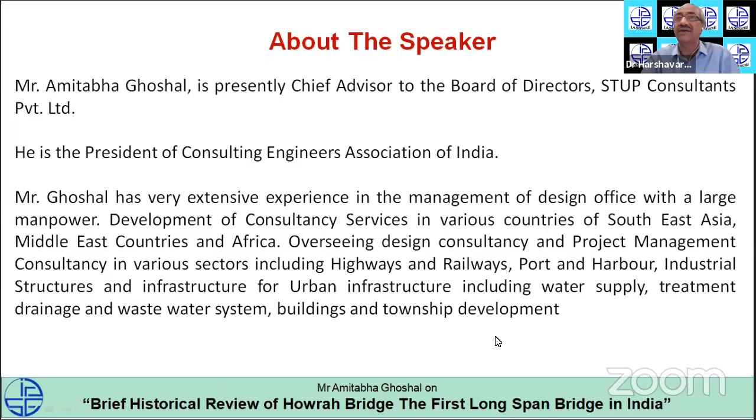We are indeed very fortunate to have someone of his eminence and stature with us today. The topic he has chosen is a beautiful one, which I'm sure at the end of the event will weld us all together in our bridge community and structural and civil engineering community.

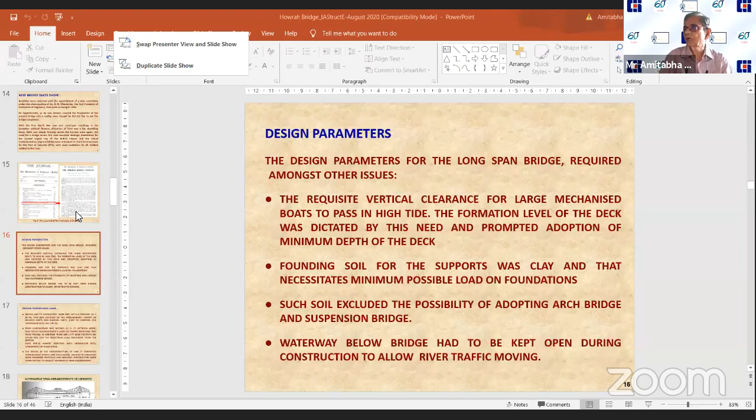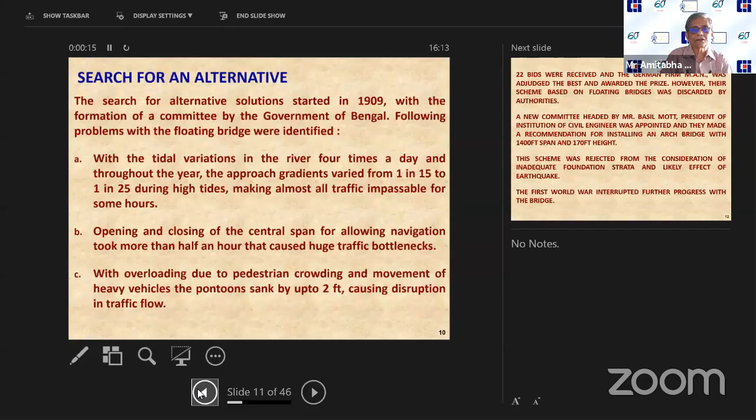Right, okay, sorry for this slight delay. You see, the title, as IAStructE has decided, is 'Brief Historical Review of Howrah Bridge, the First Long Span Bridge in India.'

This is a bridge which, as everybody knows, has been an icon of Calcutta, and for that matter, all over India, people recognize this bridge on sight. There have been films made with the name Howrah Bridge, not one, but many.

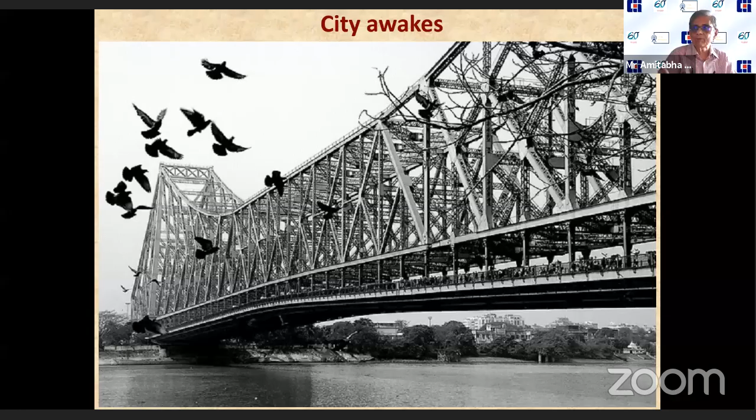And any film which shows Calcutta will somehow show this bridge with some opportunity. So the city awakes with the bridge, and it is there for the work day, and at night—for celebrating the 75th year of the bridge, Calcutta Port Trust, who still oversees this bridge, decided to make a lighting arrangement. The bridge keeps changing color at night. This is part of the city's nightlife, and anybody who wants to see Calcutta by night will have a view of it.

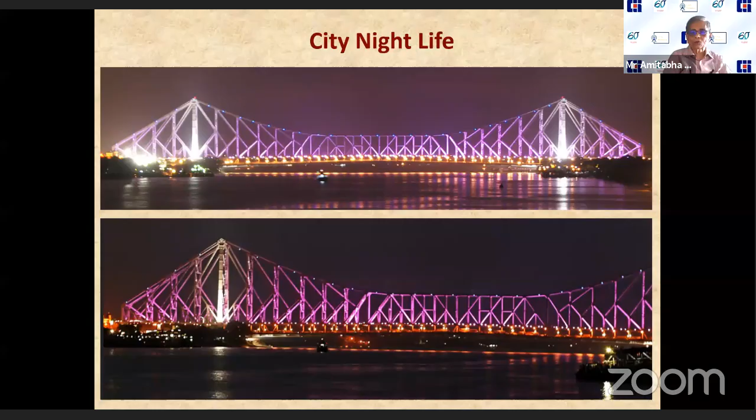You see, when we talk about a bridge, a bridge is not just infrastructure. I don't look at a bridge, and I'm sure you also don't look at a bridge, as a mere structure made of steel or concrete.

A bridge is essentially a link, not only between two places, but it links two separate settlements, two separate groups of people, and brings people together.

And that is how bridges are always glorified. If you go to San Francisco, you cannot come out without having a visit to the Golden Gate. There have been books written on Golden Gate, poems. And in London, the Tower Bridge is a prominent presence. Nobody has thought about dismantling that, even if it is a very old structure. Similarly, in Calcutta, I hope nobody will think of ever dismantling this, because this is part of Calcutta and its development.

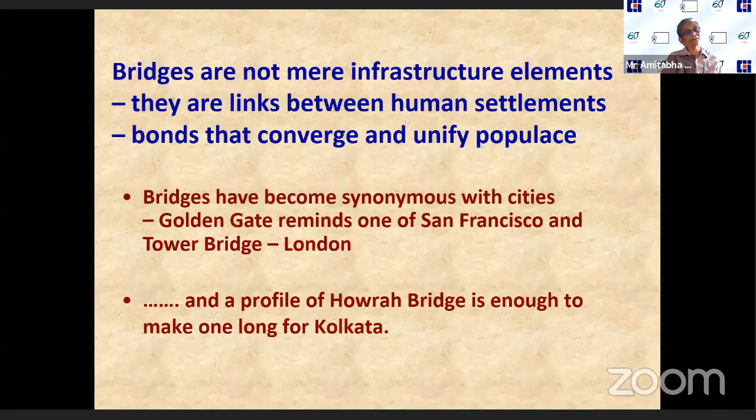People celebrate anniversaries of individuals and marriages, and sometimes we remember people after their death. We also celebrate anniversaries of organizations, just as we are celebrating the 60th year of CEAI. But engineering structures are taken for granted. Nobody usually thinks about an engineering structure unless it falls or gets damaged, or gets into news for some wrong reason, like an accident.

But an engineering structure reflects the toil and sweat of the engineers, our community. It is the fruition of a lot of effort that we see a structure built, completed, successfully maintained and utilized. I congratulate IAStructE for this initiative to celebrate this engineering marvel, and it is my hope that they will repeat such effort with other interesting structures in the country, which show the capability of the engineer.

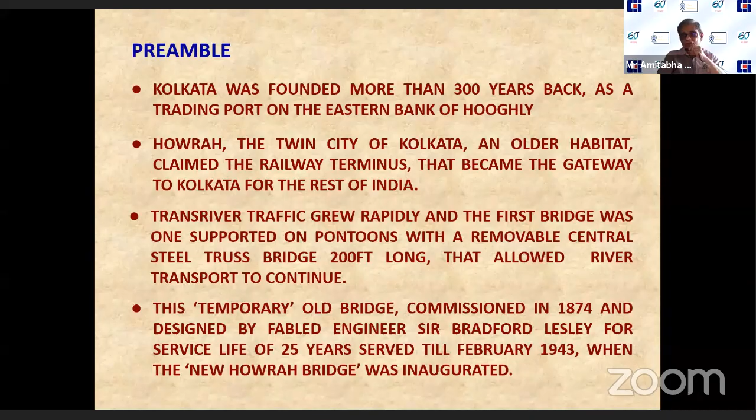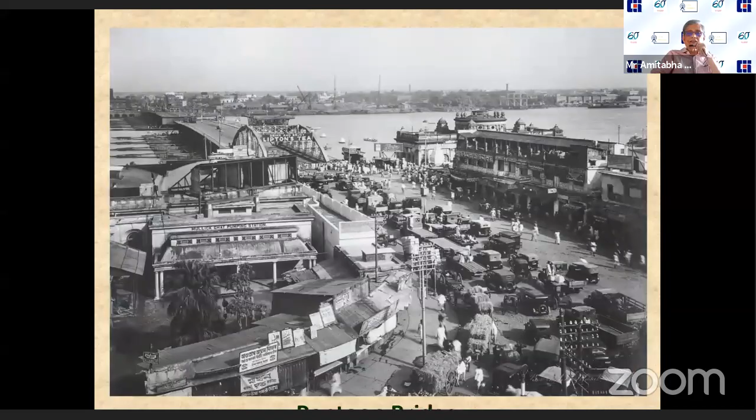Now here is another view. Even in those days, traffic jams were known. You can see when the pontoon bridge opened up, as seen here at the center, one piece of the bridge has been taken out and floated out, making the bridge discontinuous at the center. All the big watercrafts used to pass through this gap. During this period of opening, traffic would build up on both sides, and what we today know as a very common spectacle of traffic jams, that was there very much.

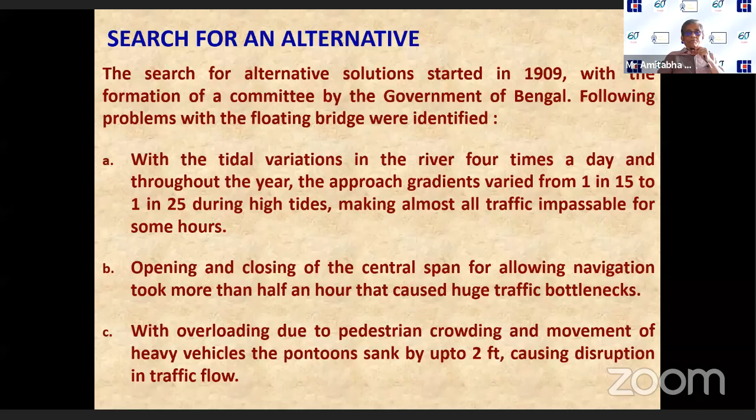Next. So they formed a committee of engineers, and invited international alternative schemes, more or less based on the floating bridge principle. But there were conditions given: no obstruction in the river channel, boats must flow all the time, minimum headroom of 29 feet from the highest water level so boats can cross, and a carriageway width of 60 feet.

In those days, it was a very, very futuristic thought, plus a footway of 10 feet on each side. And the gradient should not go steeper than 1 in 35, so that our friendly bullocks could cross the bridge.

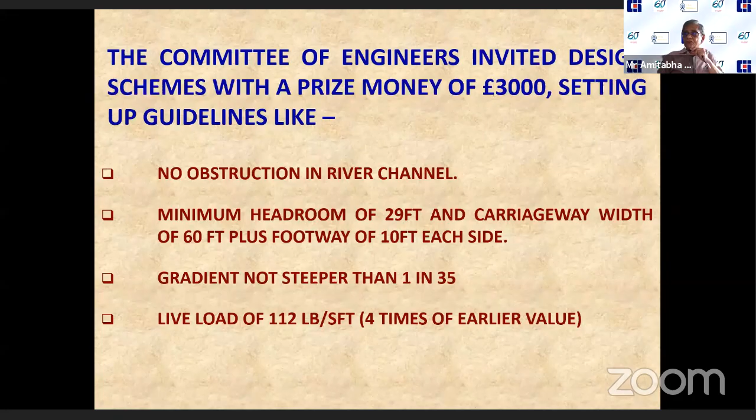The design load was given, and this prize money of 3,000 pounds was enough to attract a large number of entries. 22 bids were submitted, and the German firm MAN, which still exists, was adjudged the best and awarded the prize.

However, already there was rumbling that this business of a floating bridge cannot be a permanent solution, because one day or other a river craft will come and hit the so-called floating pier, and the bridge would be damaged. And then this variation of tide would always be there. That's the reason. So even though the prize was given, the entries were all discarded.

Then a new committee was formed. The president of the then Institution of Civil Engineers, UK, was appointed, and he recommended an arch bridge. Obviously, he did not have an idea about the Calcutta soil. Now, this was automatically rejected because of the inadequate foundation strata.

And meanwhile, the First World War came up and interrupted further progress with the bridge.

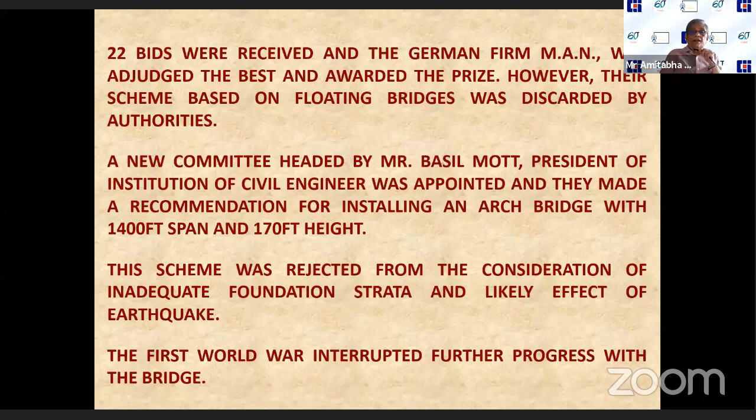Now, for a span, the port had already decided they could not afford to have a pier or an obstruction in the river, so that their flow of goods would not be disturbed. So they wanted a bridge which would be 1,500 feet or 457 meters, a single span across the river.

Now, what were the alternatives in those days for this type of bridge? One is the suspension bridge, which had already been built in the USA with a rigid anchor, where the cable is anchored into rock or some permanent structure. Another is the arch bridge, like the Sydney Harbour Bridge.

Or the third alternative was the balanced cantilever bridge, two of which, very famous, had just been completed. One is the Forth Bridge, the first major balanced cantilever bridge, and then the Quebec Bridge, which was also a successful balanced cantilever bridge. That can be done on soft soil as well, because the loads are always vertical.

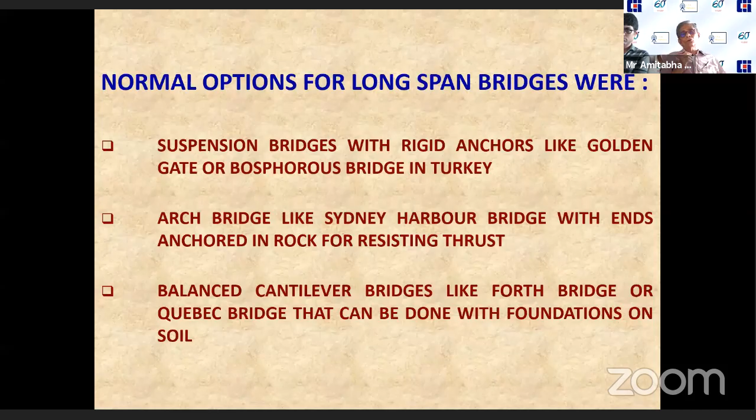Activities were started after the First World War, and a new committee was appointed under the chairmanship of Sir R.N. Mookerjee, Sir Rajendranath, who was the first president of the Institution of Engineers that came into being exactly 100 years back, in 1920. Sir R.N. Mookerjee was a persona to reckon with. He had established a firm, Martin Burn, which built the Victoria Memorial, the Belur Math, and many other structures, and was considered a very successful engineering company. He was naturally the first president of the Institution of Engineers.

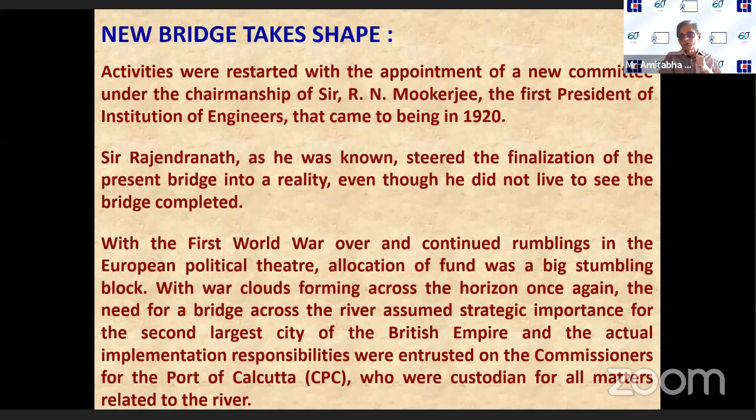This committee, if you remember the colonial times, had an Indian chairman while all the other members were very famous Caucasian engineers, mainly from England, one or two from Europe. That's the committee presided by Sir R.N. Mookerjee. His committee made a very thorough analysis of what is possible and what is not possible, and came forward with a solution for the permanent Howrah Bridge.

Just to indicate how important the Howrah Bridge was in those days, what you are seeing is the first volume of the Journal of Institution of Engineers, brought out in 1921, which had an article on the Howrah Bridge problem by one Mr. Bagley, who advocated very strongly for the floating bridge approach.

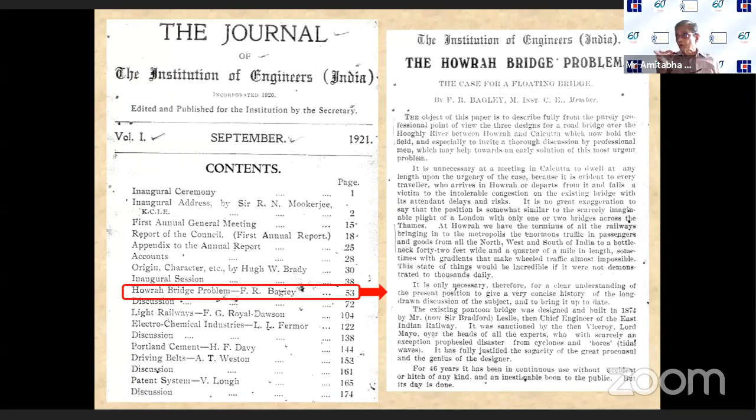The design parameters for the long span bridge included the same clearance of 29 feet above the highest water, with the founding soil being clay and silt requiring minimum load on foundation, and the waterway below the bridge had to be kept open during construction to allow river traffic to keep moving.

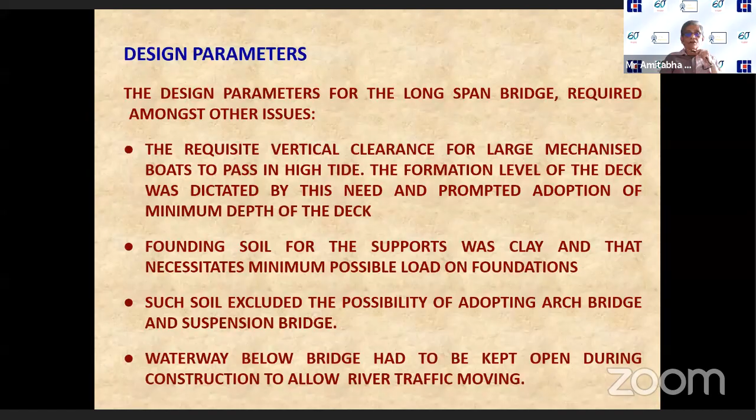The approaches had to be kept to a gradient of 1 in 35 maximum, but the bridge offered 1 in 40, making life much better for the bullock than 1 in 35. Today's Vidyasagar Setu, the second Hooghly bridge, has approaches of 1 in 25, but the old bridge has 1 in 40 - that's why it's so easy to get onto the bridge.

The future vision that those people had - they could see that with the Howrah station so close and the central business district growing just on the other side of the river, umpteen numbers of people coming from the suburbs would be crossing the river, and that's why they provided a footpath of 15 feet.

This design is very interestingly identical with the Vidyasagar Setu, which was built in the late 20th century, opened around 1993. It also has exactly 100 feet total width, including the footpath.

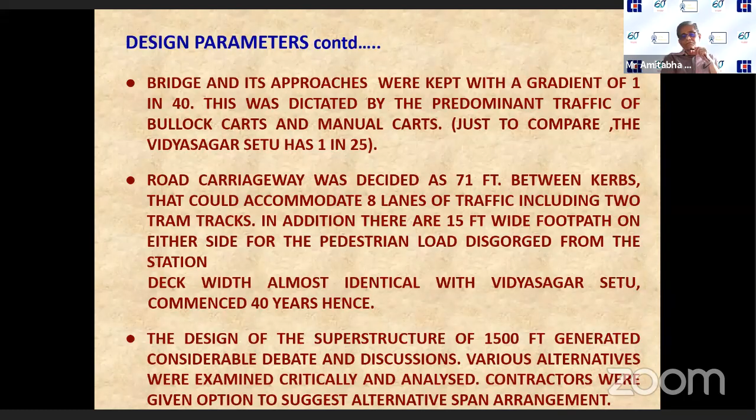The design of the superstructure for 1500 feet in those days naturally raised a lot of debate and discussion. Various alternatives were examined, and even after the official design was done by the consultants, Rendel, Palmer and Tritton (RPT), which has since ceased to exist and became High-Point Rendel for some time.

They came forward with alternatives. This scheme was recommended by Sir R.N. Mookerjee's committee - you can see the wisdom, as it is almost the same as the bridge we have today. It had a 1500 feet center span, with a suspended span at the center. The anchor span on both sides was 350 feet, anchored by dead weight on the end, so that lifting would not occur when the much longer cantilever comes into play. Those cantilevers from both sides support a hogback truss, which is the suspended span - that's why we call it a balanced cantilever suspended span.

The other alternative was a self-anchored suspension bridge, which should not require a static anchor, and should have a girder as a deck which itself would act to balance the horizontal thrust and accommodate the bridge without causing much horizontal thrust on its foundation.

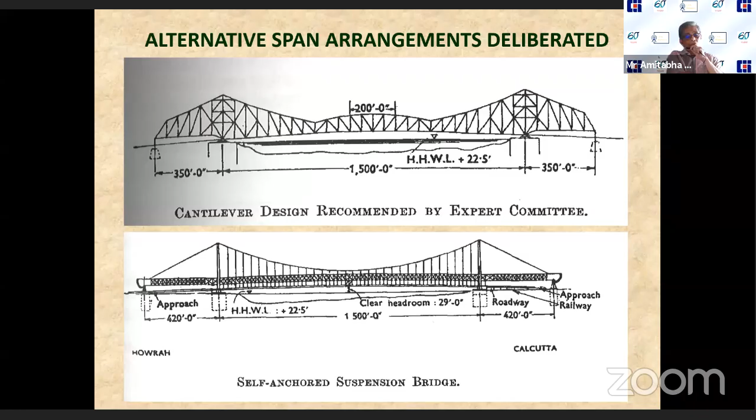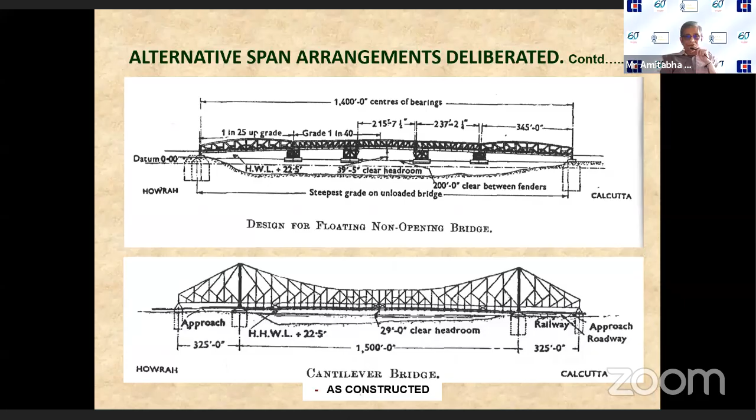The anchor was 325 feet. So as it is, there is an overturning moment, plus the weight of the suspended span, and that required, at the anchor, very heavy concrete blocks, 27 feet by 54 each, 2 numbers, going to a large depth, so that the bridge does not topple.

And the other interesting thing, you can see that the deck is hanging from the truss. The truss bridge is holding the deck, which is hung from vertical hangers, and the approach spans, the anchor spans, are kept open so that the vehicles could take a turn and go to the bank.

Unfortunately, by the time the bridge was being built, a lot of structures, including the first mint in the country, the first mechanized mint in the country, had come up just behind the Calcutta end of the bridge. And that's why straight flow of traffic was not possible. So traffic had to take a turn, a right angle turn, to go to the bank.

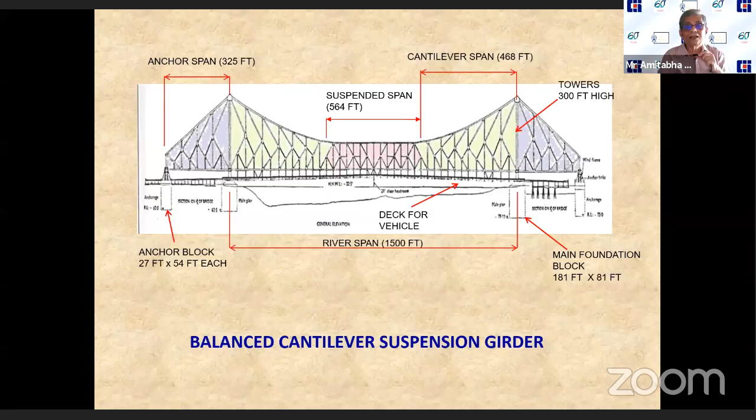Now, based on this official scheme of Rendel, Palmer and Trithon, Port Trust decided to invite global tenders, but they were wise enough to keep a provision that the tenderers can offer alternative design, that is EPC scheme: engineer, procure, and construct. A contractor was given the freedom to choose his option and give an alternative scheme which would be examined and valued.

Obviously, there were two intentions. One, whether a cheaper scheme can be obtained. And the other, which I think the consultants fully agreed with, that by having alternate designs by renowned constructors, they will get their official scheme also proof-checked without paying any money. Anybody who is going to quote will first check the official design and then examine how it can be made more economical.

Now, 4 bids were received. There were both places bids could be received, either at the London office of the Port Trust or at Calcutta at the Port Commissioner. Now, 3 bids were received at London: one from a British firm, one from a Scottish firm, and the third from Germany. In Calcutta, there was one bidder, a new kid on the block, the Braithwaite, Burn and Jessop Construction Company, which had just been formed for quoting for the bridge.

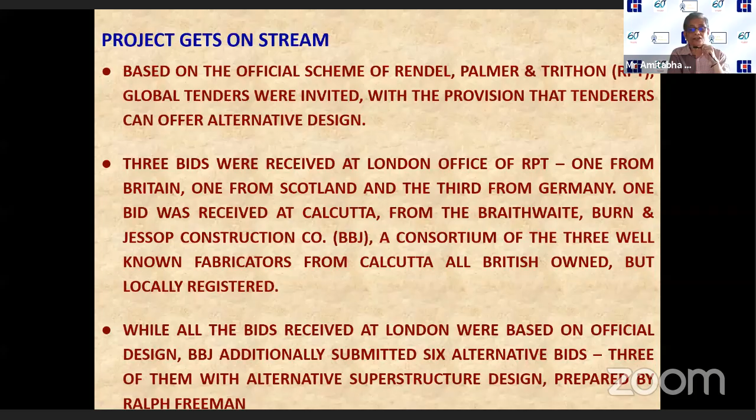When the bids were opened, the German bid by Krupp was found to be complete and financially the lowest official bid.

The bids by BBJ were actually the lowest financially, but the alternative bids were all rejected, either on consideration that the suggested foundations were considered by consultants not to be convenient or feasible, and as far as the superstructure alternatives were concerned, they were considered extremely futuristic and untested.

Mr. Freeman came forward with the concept of a grid deck, an orthotropic deck, and he proposed a hybrid solution where the top chord of the truss from the tower, in the suspended cantilever portion, was replaced with cable as the top tension member. So it was a hybrid solution combining cable and structure.

Now all these were rejected, and therefore Krupp's bid was shelved because of political reasons. War clouds were already gathering. It was 1937-38, and it was decided that it would be too risky to give the work to a German company, which of course proved to be correct once the war broke out.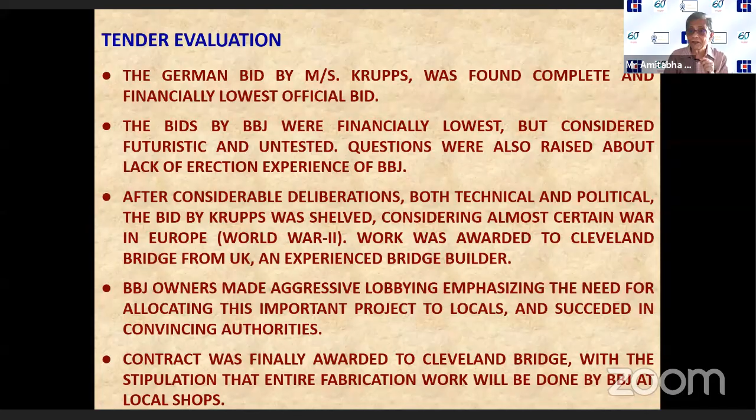Looking back in hindsight, it was a win-win situation because the local industry got what they wanted - fabrication of 26,500 tons of heavy steel work. And for Cleveland Bridge, all the hassles of bringing fabricated steel from the UK all the way by sea, where German vessels would be moving around trying to torpedo them, would be avoided.

So BBJ, when they got the work, wanted to prove themselves, and they produced really excellent international-class workmanship. So much so that for a length of more than 300 feet, the entire anchor span they assembled, the error was found to be less than 2 millimeters. That is the type of workmanship they produced, which was lauded by the designers and by the people connected with the bridge.

Now the benefit of this decision was that the engineers and workmen from India who received this training ensured that in future no major steel bridge work had to be done from outside. And the workers also got baptized in the process.

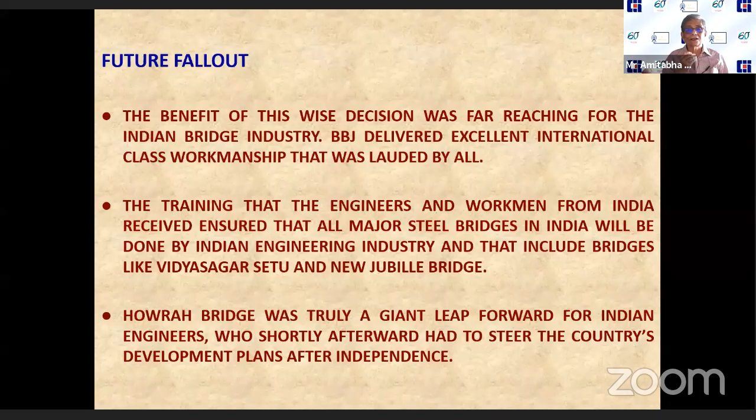As I was mentioning about the fabrication, this is a quote from the paper by Howarth and Shirley Smith. Shirley Smith is a very famous bridge engineer who wrote the book 'The World's Great Bridges.' The quote is: fabrication was very good and suffered in no way from being carried out in 4 different shops. For example, a careful check on the full length of the lower chord of the anchor span, comprising 8 members, showed that it was correct to within 5/64 inch over an overall length of 325 feet.

Now that is more than 100 meters. In 100 meters, the error was less than 2 millimeters.

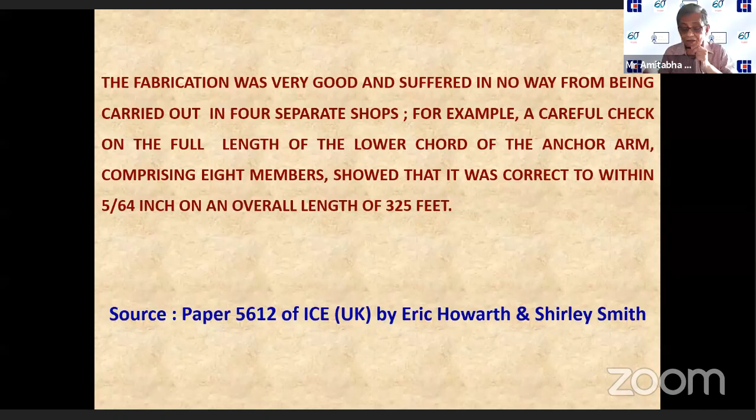Now even the foundation work, I will come to the superstructure later, was considered unique. Particularly those coming from Mumbai, including my moderator, will be happy to know that HCC, the Hindustan Construction Company, did the foundations in those days, and what was, and even today would be considered, a unique foundation concept.

Instead of going for separated foundations as was done for the Vidyasagar Setu for the 2 towers, here for the 2 verticals of a tower, one common caisson foundation, rectangular, 182 feet by 81 feet, comprising 21 chambers - 7 by 3, I will show you a picture - 3 on the width side making 81 feet, and 7 on the longer side making 182 feet, was pitched and dug into the river bed to a depth of 87 feet on the Howrah side and 103 feet on the Calcutta side.

On the Calcutta side, because there was fine sand prone to blowing, they had to work with compressed air, again a unique thing in those days, with 3 times atmospheric pressure. People used to go down and do inspection with decompression chambers. It was the first time compressed air work was being done, and there were cases of bends disease to the workmen due to non-familiarity with the do's and don'ts of compressed air work. They did not have the mandatory waiting time which we give today when entering a compressed air chamber.

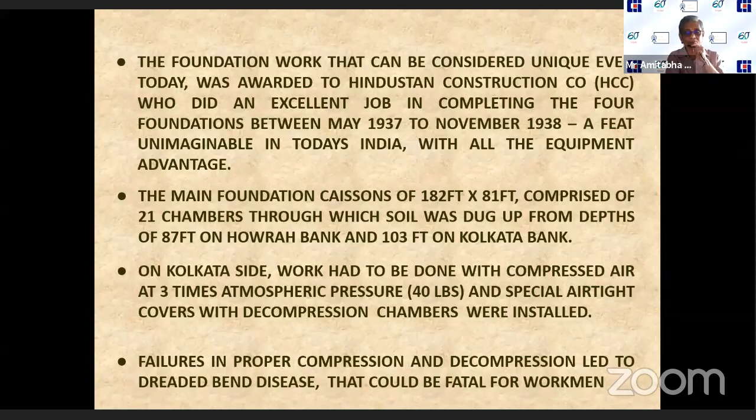This is the schematic drawing of the foundation. You can see 7 across and 3 on the other side. This is the plan, and on top is the elevation. The whole idea was to simultaneously grab from 21 chambers so that the entire colossal mass goes down without any tilt or shift. The foundation was installed without any recognizable tilt or shift, within a couple of inches when it was set, with no question of any corrective action. Again, the wisdom of the planners and designers showed in the conception of the foundation.

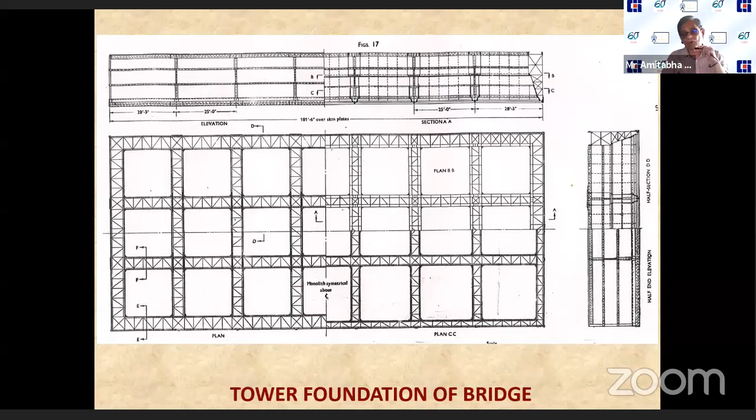The superstructure erection at site had to be done without any support from the river. It was not allowed to have any giant cranes on the river. So the bridge was designed right from the beginning based on cantilever erection, so that the bridge would come out from the bank, cantilevered out, and be completed.

26,500 tons of steelwork were fabricated in the works of Braithwaite at Khidirpur, Jessops at Dum Dum, and Burn at Howrah on both banks. Single pieces were up to 60 tons, and these were transported by railway line specially laid along the river. They were brought near the bridge where custom-built cranes were lifting them, and the crane which erected also lifted materials, sometimes from the river, sometimes from the bank. All this steelwork from the three fabrication shops was assembled in another shop called Victoria Works, next to Braithwaite at Khidirpur, laid out only for assembly of the bridge structure.

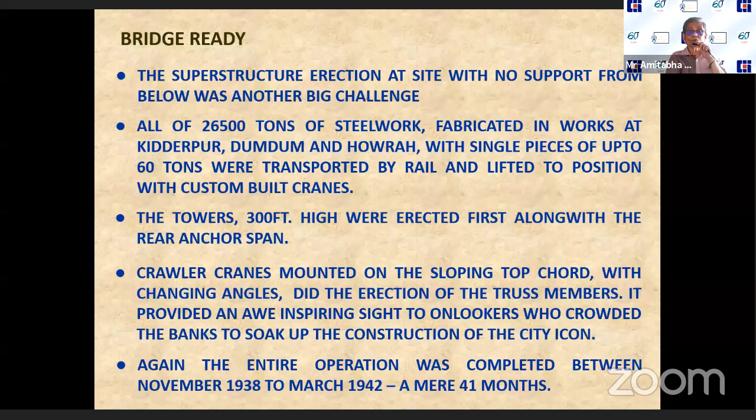The towers, which were 300 feet high, were erected. I will show you how the erection was done. They first started erecting from the anchor span, and from the tower went back to the anchor span, and then it came to the cantilever span. Cranes were specially designed, called creeper crane or crawler crane, which could tackle the varying slope of the top girder. It could climb at a steeper slope on the anchor span, and then coming to the inner span, the slope would keep changing, lastly becoming horizontal, and the crane had arrangements with jacks so it could be easily adjusted, and the crane platform was always horizontal.

This entire erection of 26,500 tons of steelwork, its fabrication, assembly, and erection, was completed in 41 months, from 1938 to March '42. And please don't forget, these were the years when war was on. There was scarcity everywhere, there were problems, war emergency was there, and the bridge was not the topmost priority.

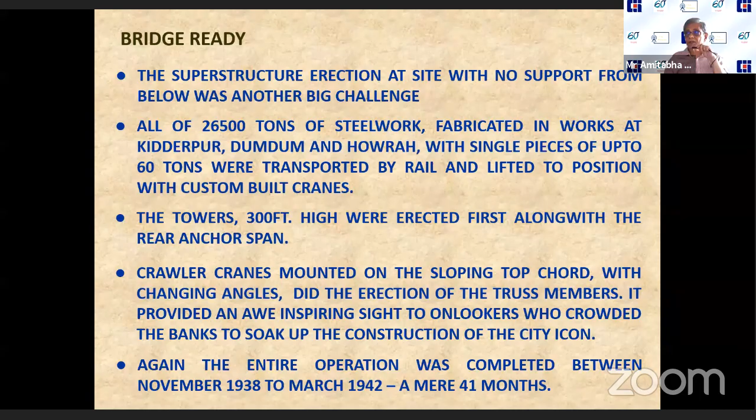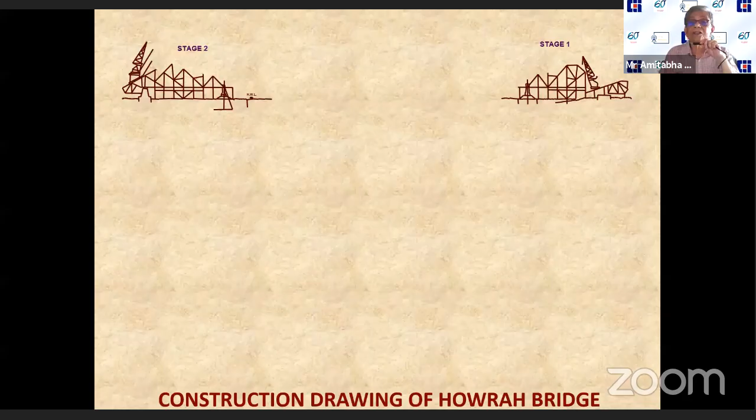Now I will show you the construction drawing. This is stage one. You see on the bank, the creeper crane is in position on both sides, and they are going on building the anchor span. From there, from on top of the truss, they built the tower, and once the tower was completed, the crane toppled over from one side to the other by adjustment and using its own power. No problem, they crossed.

After crossing over, it started cantilevering. This is how the cantilevering started. You can see it's like a meccano set, gradually moving forward, with the slope of the crane getting altered regularly.

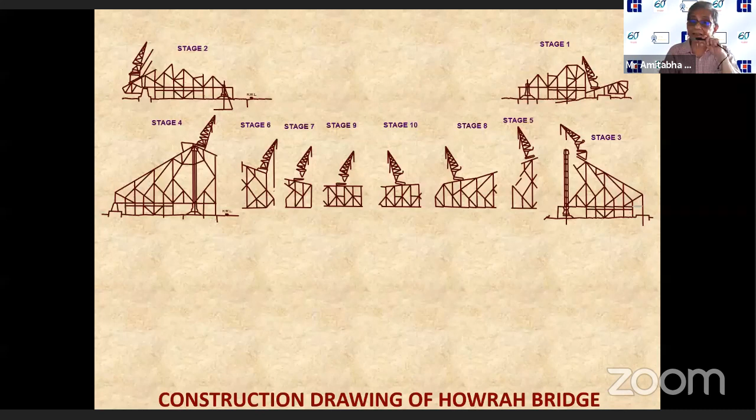When 750 feet of steelwork is cantilevering from 325 feet of anchor steelwork, there will be a huge amount of dip, and here was also that dip. But for that, they had built an arrangement inside the top chord, where the cantilever ends and the suspended span starts. They had built in adjustable jacks so that the span can be lifted, and also incorporated arrangements at the anchor ends so the entire structure can be lifted.

They made calculations so that the shortening of the bottom chord and the lengthening of the top chord, which will happen with cantilevering, are catered for in fabrication. Even then, when the central closing was there, things did not go forward as easily as thought, because the temperature of the day was different from the temperature on which the fabrication had been based. Therefore, for the end bottom closure, they had to use heat for expansion. They had to heat the chords, and then when they came together, they made the closure.

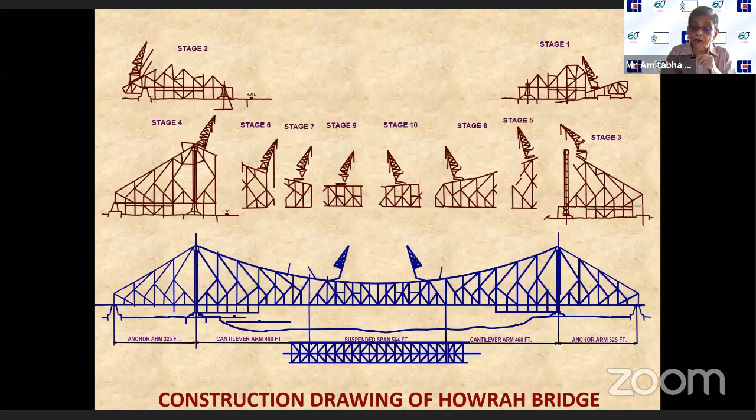I had been given an hour, but I suppose the moderator and the president's time isn't included in that, so I have a little more, just about 10 minutes to finish. Go ahead, please go ahead, sir.

Okay, you can see some of the old pictures of the bridge being built.

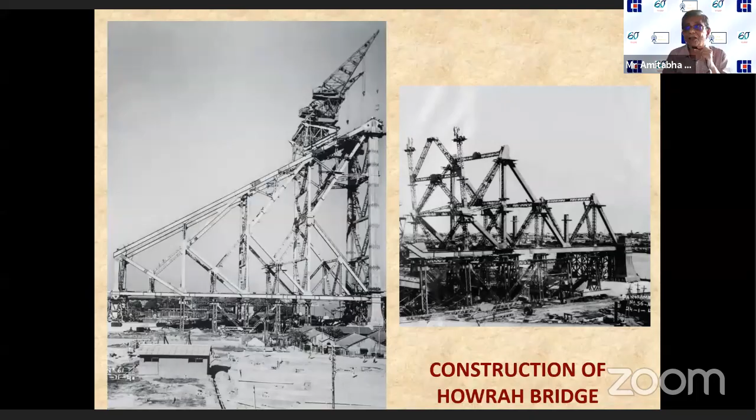The anchor span was built on giant trestles, for which they had installed Franki piles for supporting that load. You can look at that marvelous crane, two of them, on the roof, on the top, with a cross girder on which there are two cranes for erecting the two trusses. They were moving up the slope and going down the slope, up the hill and down the dell.

On the right picture, they have come over on this side, and cantilevering is going on. You can see the river flows unhindered. Of course, the pontoon bridge was still there; it could not be disturbed because it was still providing for all the traffic to flow.

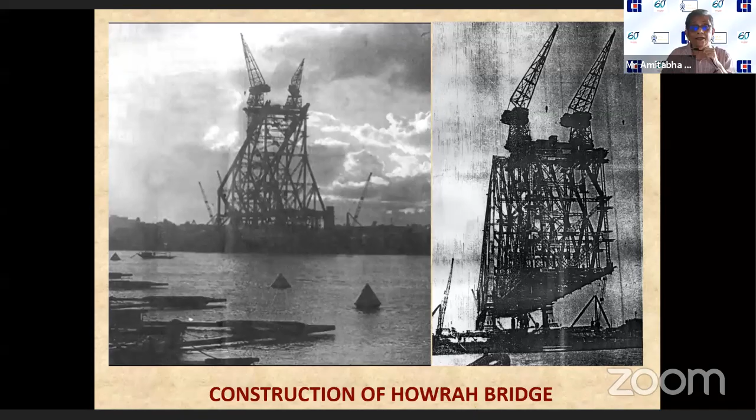This is another picture. You can see the Howrah station in the back, on the top picture. That is the Howrah station. Not much change till now.

This is the completion picture of the bridge, where all four cranes have done their duty and got dismantled after erection of the deck. You can see the part of the deck done, and after completing their duty, they got dismantled and brought back to the deck.

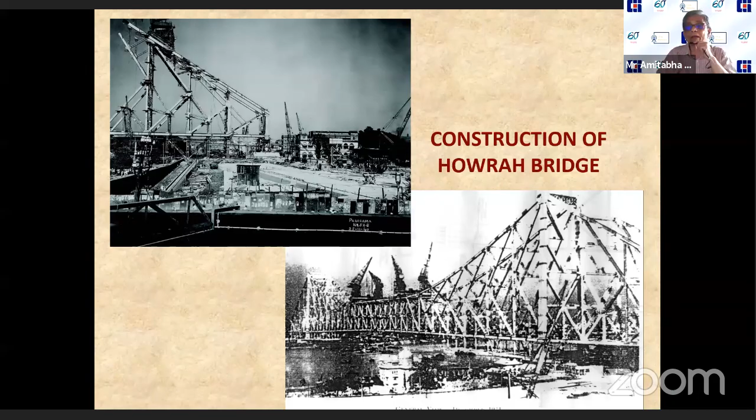The bridge is open to busy traffic of man-driven vehicles and bullock-driven vehicles, and of course horse-driven chariots as well. You can spy some old automobiles, the T4s and the very old trucks which had just been commissioned.

The bridge even today looks the same. I will come to that later.

This is one of the erection pictures. These are Indian workers, you can see Sardarjis, very active, and 300 feet above the river they are happily erecting, joining the pieces and trying to get the holes faired before they can do the riveting.

This is what I call the baptism of the Indian workers. This young boy hanging at the front, facing my side, was Omeruddin Khan, who became the foreman of BBJ afterwards. When Mokama Bridge was built, he was the foreman, and he was very much respected by the bridge construction staff. Everybody used to call him Bada Sahab, and he used to be there just to give his presence.

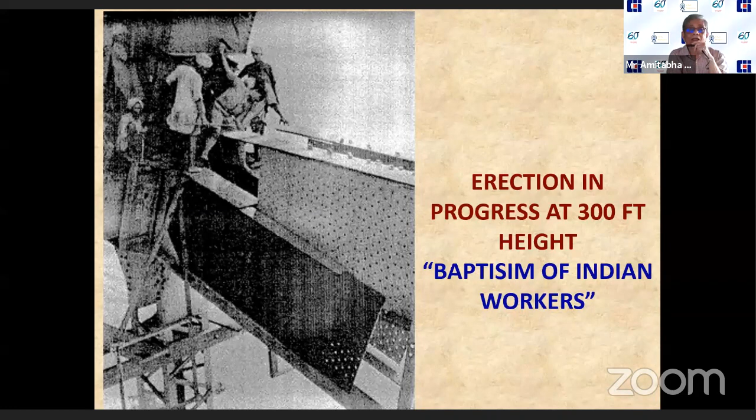What I have always found fascinating is the way work could be done in those days. The concreting was started in September '37, and the plugging was completed in May 1938.

Seven to eight months for those two giant caissons you have seen, and the foundation was ready. Anchor steelwork started from November '38, and the deck steelwork got completed in March 1942. The bridge was ready for traffic.

In August 1942. But very interestingly, the bridge was opened to traffic only on 3rd February 1943. Those interested in history will perhaps understand why the bridge had to wait six months before it was opened.

August '42 was the August Kranti movement. From 7th of August, this non-cooperation movement started and violence started on the streets. That is why no celebration could be held for opening this grand bridge.

No formal opening was there. Ultimately, on the 3rd of February 1943 at midnight, one electric tram was taken across the bridge, and that was the opening of the bridge, unsung, unheard. From the next day, the bridge was put to use.

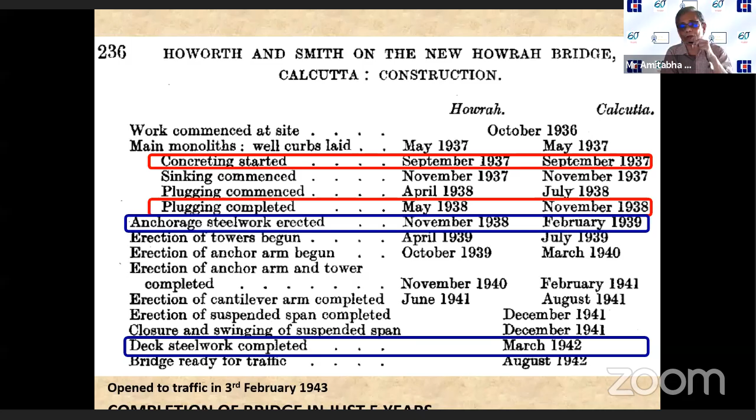Now, the other interesting thing about this bridge was the sourcing of materials. 26,500 tons of steel were used, and mind you, a special grade of steel nobody had used till then. The steel specification was BS 15, which today we call mild steel, formerly IS 226, now IS 2062 — I think it's now called grade 250.

That was the only construction material available at the time. But here, knowing this was such a large cantilever, the designers decided that unless they used higher tensile steel, the tonnage would be too much — it would have become more than 40,000 tons with ordinary steel, which would have delayed the work and made it much more cumbersome.

So the so-called high tensile steel, which we came to know as IS 961, BS 548, and even today is known as grade 350, was specially used. The only other place that grade of steel was being used concurrently was the reconstruction of Chelsea Bridge, a suspension bridge. They took the cue from there.

They asked all the steel manufacturers in England to experiment in manufacturing this steel. The designers drew up the specification — what would be the component of the steel, what would be the percentage of various components — and asked them to try it out.

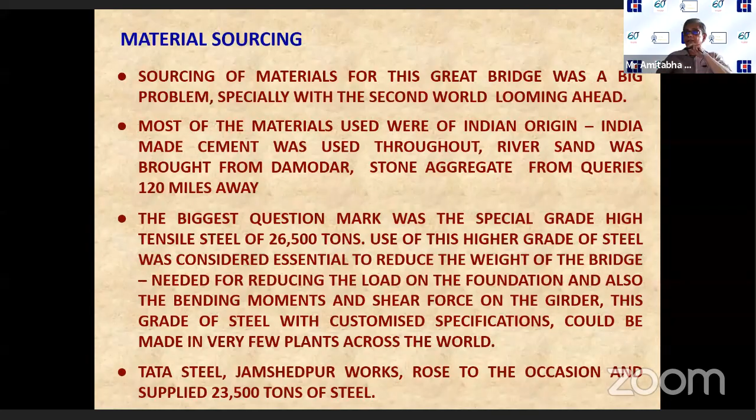All the other materials too — even the cement was Dalmia cement, sand was brought from Damodar, and stone aggregate came from Pakur. I will show you the physical properties of the high tensile steel, which were submitted for testing.

You can see that 'home steel' means steel made in UK, and the Indian steel is what was made in Jamshedpur. The yield stress is slightly better for Indian steel, and even the elongation percentage is better with the Indian-made steel.

And that's how they won the game and got the order for this 23,500 tons of steel, which perhaps many in Tata Steel have also forgotten today.

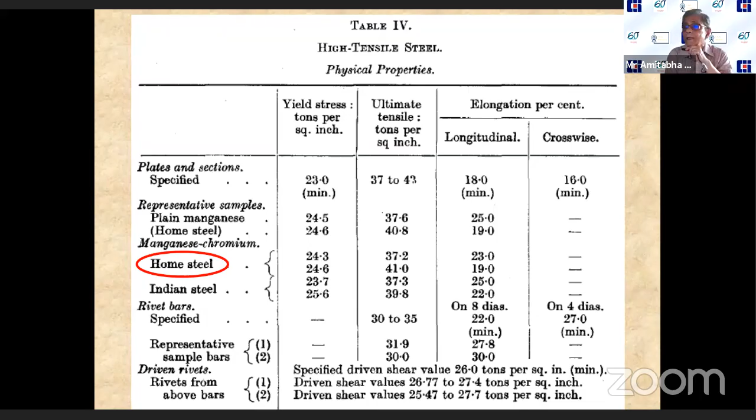Now, we did a little checking, a little research into how the bridge is so agile even today, and there have been no damages anyway.

The design specifications for this deck: the design load given by the consultant was 488 kg per square meter, giving a total loading of 4825 tons on the deck. If you take IRC 6, which allows 6-lane class A loading, we get a deck load of 3984 tons.

So instead of 4825, even today if we design this bridge, the design load would be less than 4,000 tons — that leaves us a margin still. You could say this was a wastage, that they over-designed unnecessarily, but I would say they saved it for the future.

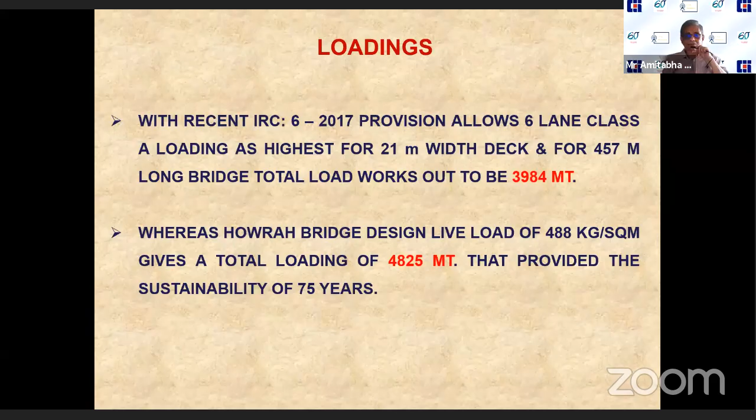This is foresight which has gone into the design specification. Next, look at the bridge. This is a recent picture taken from the bottom, showing the deck and the stringers. Unfortunately, it was not orthotropic because that was not accepted.

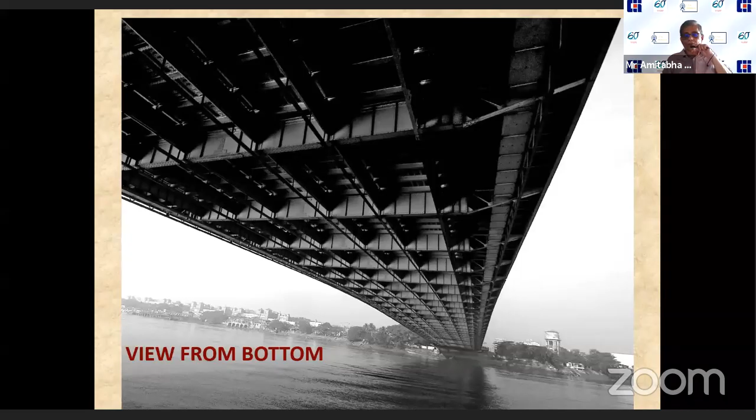These stringers are simply supported with expansion. And this is how it looks from the bottom chord of the truss, not the deck. This is where the bridge truss ends, and this is the bottom chord. You can notice that every diagonal has an arrangement for climbing, for maintenance purposes.

Look at the top chord, which did not have any top lateral bracing because it was a cantilever truss, permanently in tension. Therefore, the cantilever part did not have cross bracing, but they provided stout cross bracings at the verticals. That is how the geometry has been maintained. These bracings, which we tend to ignore or omit these days at the cost of the bridge's stability, had given this bridge that capability. Everywhere, provision had been kept for maintenance workers to climb.

Of course, that had a negative effect. People out of their mind, deranged people, often climb the bridge and go to the top and say that they are the king of Calcutta.

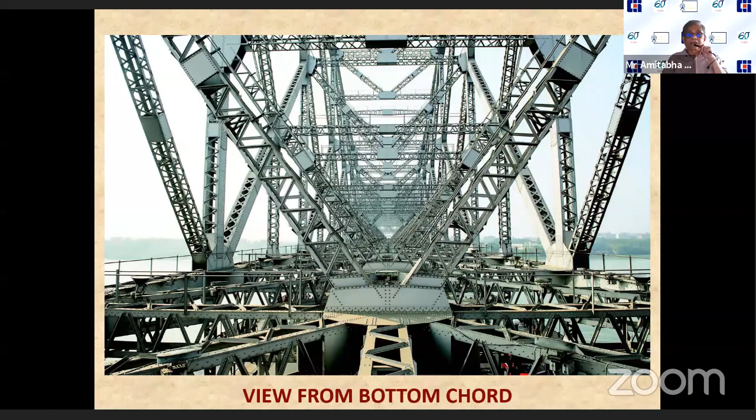Next, the other interesting thing I had passingly mentioned is that adjustments are provided in the bridge in case there is a settlement of a tower on either end, in which case the bridge will develop a kink. So they made provision in the anchorage adjustment so that the structure could be pulled down at the anchor level and the tip of the cantilever can be raised.

They had provided anchor girders. As I mentioned, there were two anchors under two trusses, with two verticals. There is a grillage girder, and they have provided adjustable jacks, 16 hydraulic jacks for each anchor, so 64 jacks in total, and they are still available for use. This arrangement was made so that the bridge can be erected successfully, and if ever settlement happens in the clay foundation, that could be taken care of.

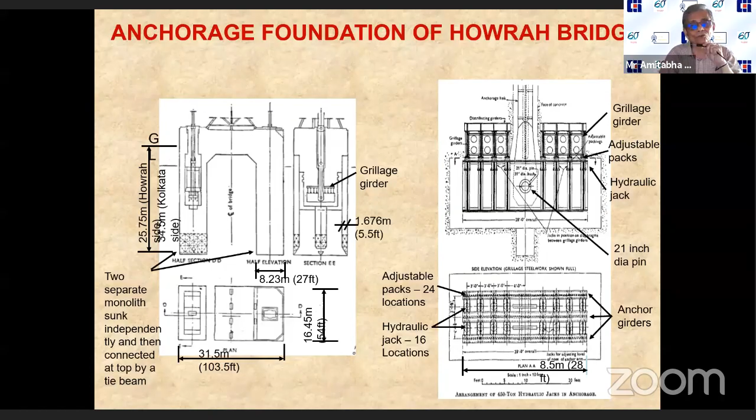Next, these are some of the very special arrangements in the bridge. You can see on the right the suspended span, just supported on the cantilever tip. You can see the use of large pins so that free movement of the bridge is possible. There is even a pin on top of the vertical, which is the hanger for taking the deck, so that expansion and movement of the deck does not get transmitted to the truss. And then there is a jacking arrangement by which one could pull the girder when the complete closure came. These were the gadgets which were used.

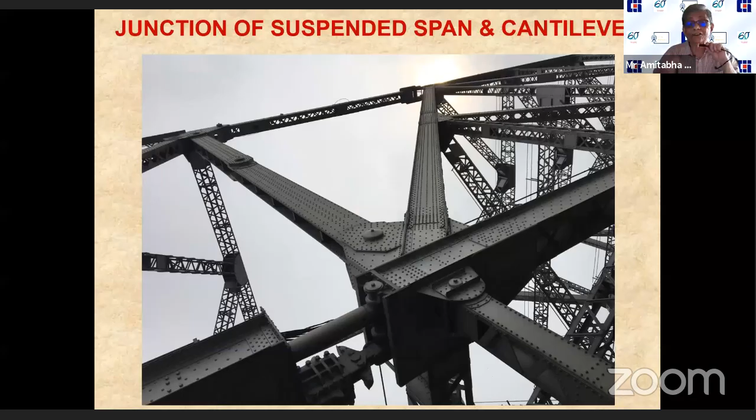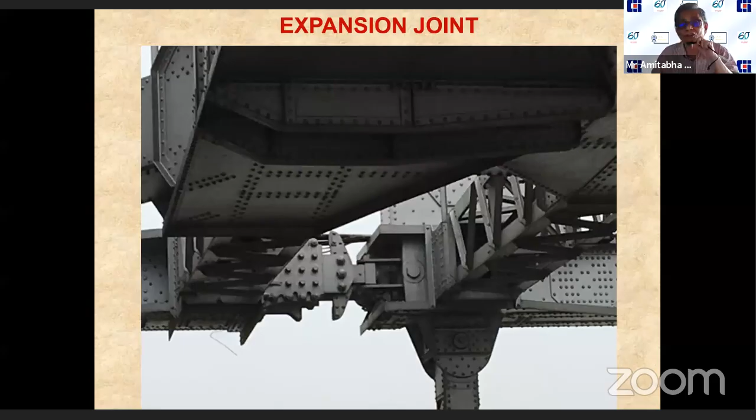Next, this is another one. You can see the gadgets. These are all recent pictures, and they are in good upkeep. You can look at the rivets; they look absolutely perfect. Probably I am being too partial to the old age, but okay, I can afford that. These are the movements, the gadgets which are provided in the bridge for future use.

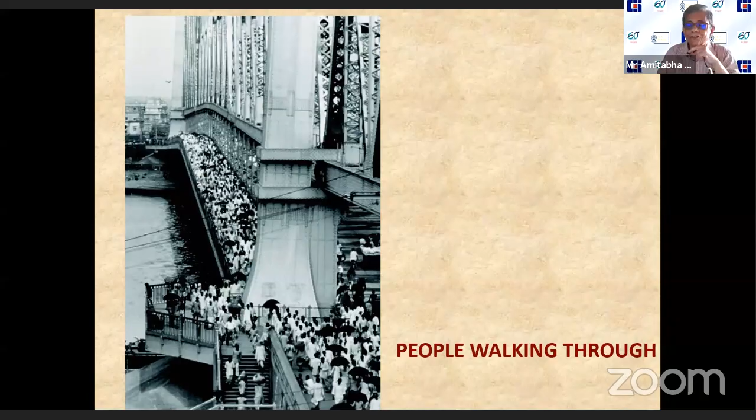Now you can understand the wisdom of having a 15-feet footpath. This is a normal day, with people returning to catch their train at Howrah station, the day workers. It is the same scene as you perhaps see in Victoria Terminus or Chhatrapati Shivaji Terminus at the end of the day, and the bridge is full. You can understand why the bridge is still being loved.

What are the special features of this structure? One was that, right from the beginning, emphasis is given on the aesthetics, not only on the elevation. If you see the towers, they have been flared out at the bottom, not for any structural reason or to utilize material fully, but that profile has been given so that the towers look attractive.

The travelers and pedestrians get a view of the river and the city bank because they are traveling along the hung deck, and that allowed all the dirtying and environmental degradation that people can do to a bridge to be taken on the deck, not on the truss.

Easy to climb, as I have told you. This was the first major bridge in the world using high tensile steel, and the first major bridge in the world using the principles of pre-stressing of girders. The compression chords have been lengthened, the tension chords have been shortened, and the joints kept true to the geometric design—that's how pre-stressing was introduced, allowing secondary stresses to be kept away. The bridge gets its perfect shape when the maximum dead load and live load is there.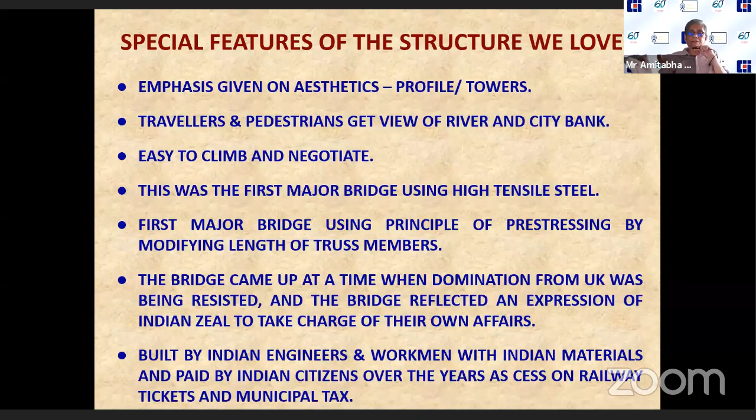Well, I will finish my talk by showing you an excerpt from a recent book on bridges. I just came across it, somebody sent it to me. It reads — you can't read it, I will read it.

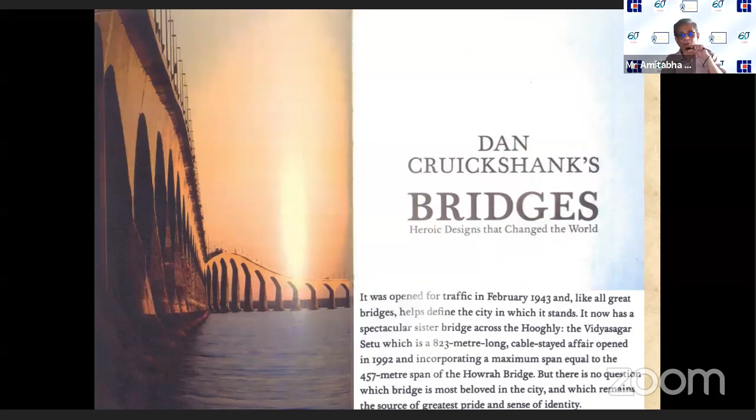Thank you very much for listening to me.